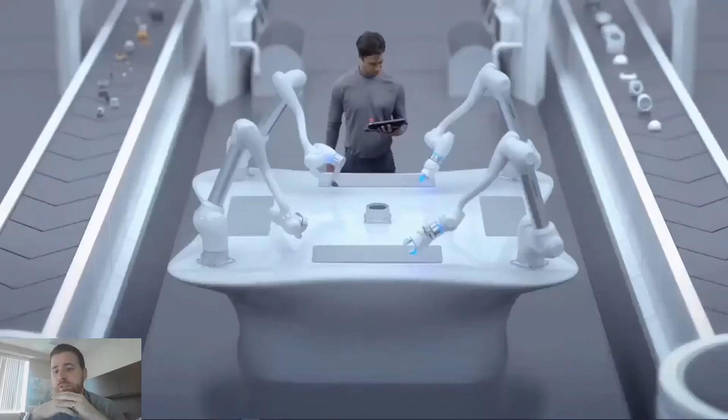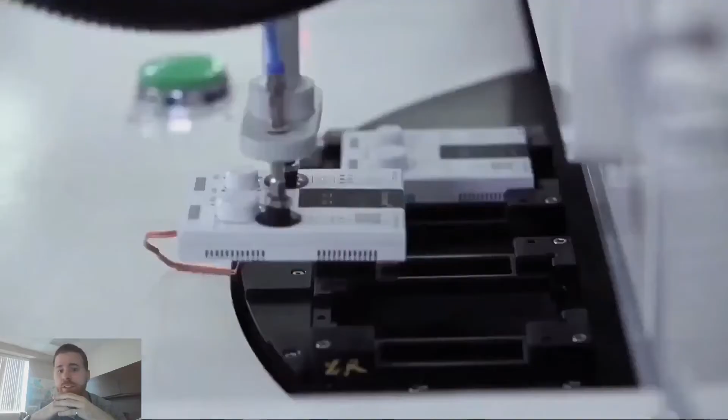Doosan Robotics was created a few years ago and is rapidly rising as one of the top cobot makers in the world. They just recently passed all the certifications needed to enter the market of North America and Europe as well. That's one of the reasons you're not seeing them yet.

The first series that Doosan offers is the M series, which comes in four different robots. The first robot is the M0609. The first letter of the robot's name represents its series, and the next two digits represent the payload. So 06 means 6 kilogram payload, and then the 09 represents the reach of the robot, 0.9 meter reach. Then there's the 0617 that has a huge 1.7 meter reach, and then there's the M1013 with 10 kilogram payload and 1.3 meter reach, and finally the M1509 with 15 kilogram payload.

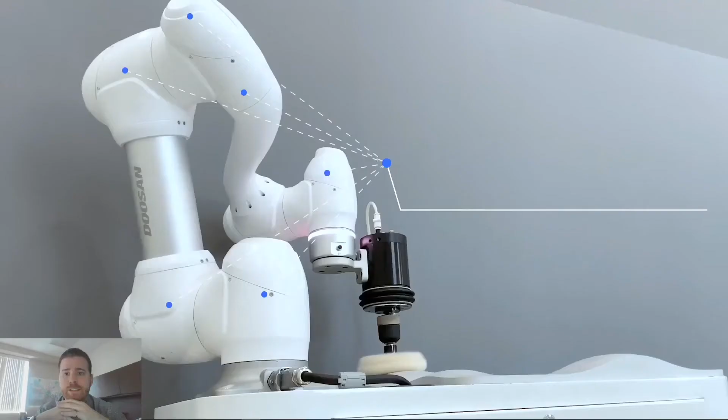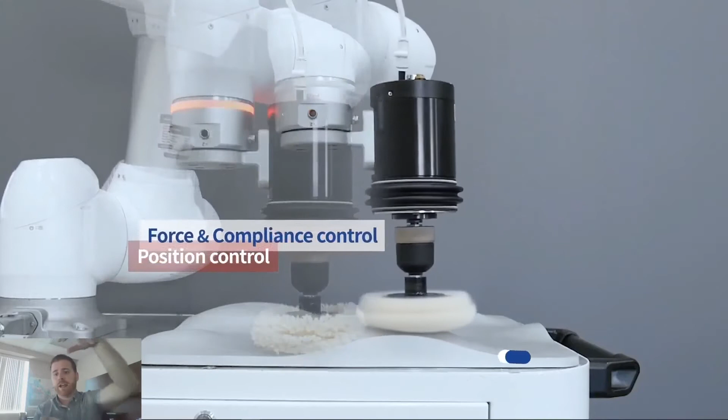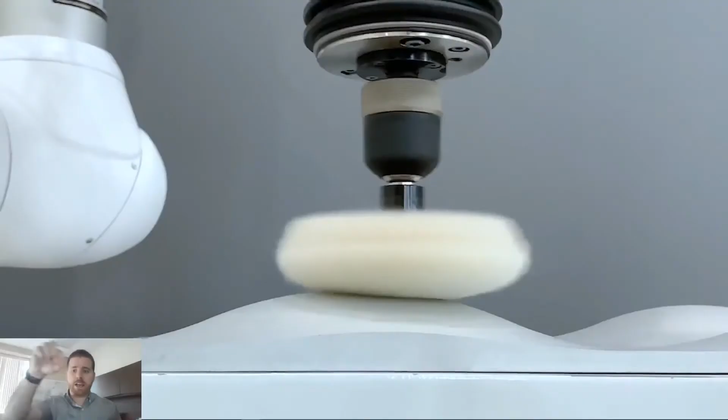One of the huge advantages of the Doosan M series is that they have torque sensors on every axis. Let me show you very quickly. The fact that they have torque sensors on every axis means that the M series is the most sensitive cobot on the market. It allows it to do some very advanced force and compliance controls. As you can see on the screen, you can apply a constant force and apply a compliance mode that will make the robot adjust itself depending on how much feedback it gets on the surface. So, unlike a robot that will try to follow the line, this robot is able to move around very, very efficiently.

When you order our M series, it will come with the controllers and the teach pendant as well. There are several options you can choose from, like the color of the robot, white or navy. You can also opt for a DC controller instead of the standard one, which will allow you to put the robot on a mobile robot, like our MiR robot, for instance. There's also a stainless steel model if you want it, and there's also the cockpit, an option that will allow you to take the robot and move it around freely. I'll show you a demo a little later to see how it works.

Then the second series is the brand new A series. It comes in four different models again. One of the main advantages of the A series is that the robot is both faster, more accurate, and also less expensive than the M series. We are pretty confident that the A series offers the biggest ROI on the cobot market right now.

The A series comes with its controllers, the DART platform, and e-stop buttons, and there are several options like the M series. You can choose between navy and white colors. The DC controller is yet to be released, but you still have the option to add a cockpit, and then there's the smart pendant and teach pendant that are available.

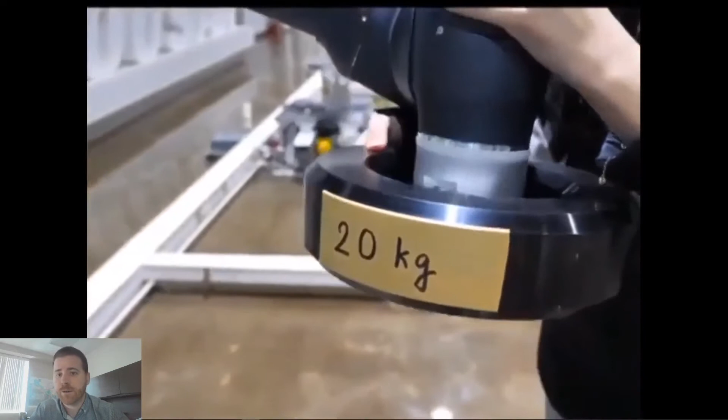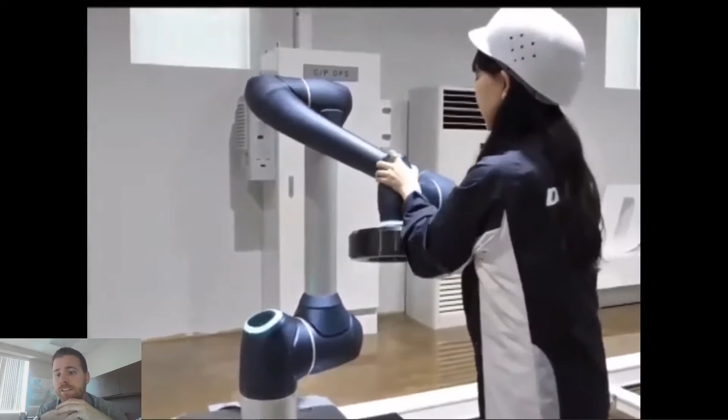Then finally, Doosan has just announced that by the end of this summer, the new H series will be available. The H series is for heavy, and will offer two robots: one with a 20 kilogram payload, as you can see on the screen right now, with 1.7 meter reach, and then there's the H2515 with 25 kilogram payload and 1.5 meter reach.

Those robots will be available at the end of the summer and will allow Doosan to offer the widest range of cobots on the market, with 10 different robots ranging from the very small A0509 to the huge H2515. Doosan offers many different features that are usually only available on industrial robots.

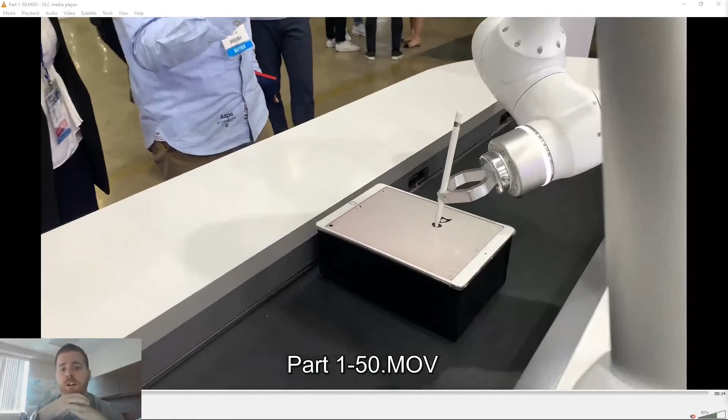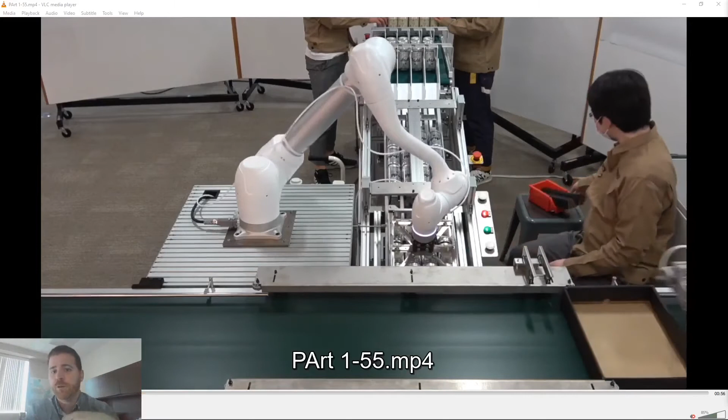One of those is conveyor tracking, if you want to follow objects on the conveyor. I'll just show you a more concrete example with Asahi Group, who have selected Doosan for their beer packaging solutions. As you can see, the Doosan will go and pick several bottles at the same time and place them directly on a moving box.

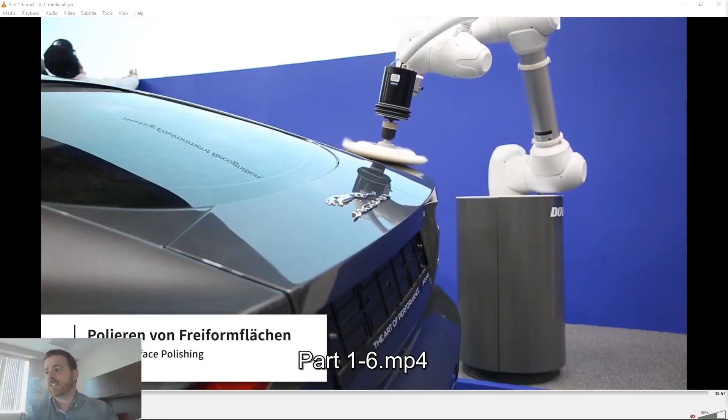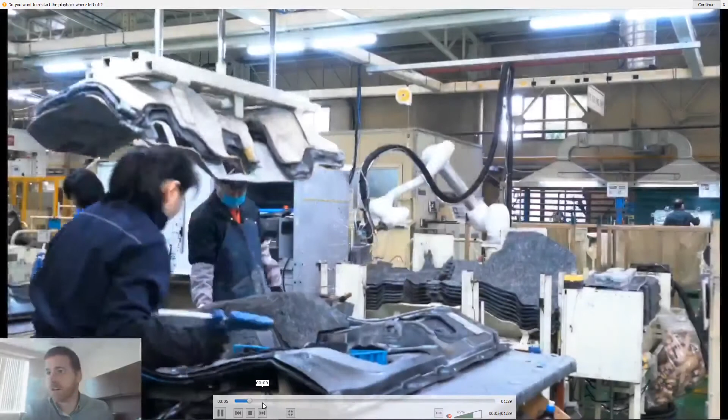There are many different applications you can have for the robot, such as polishing, for instance. There's also gluing or painting, if that's something you might find of interest.

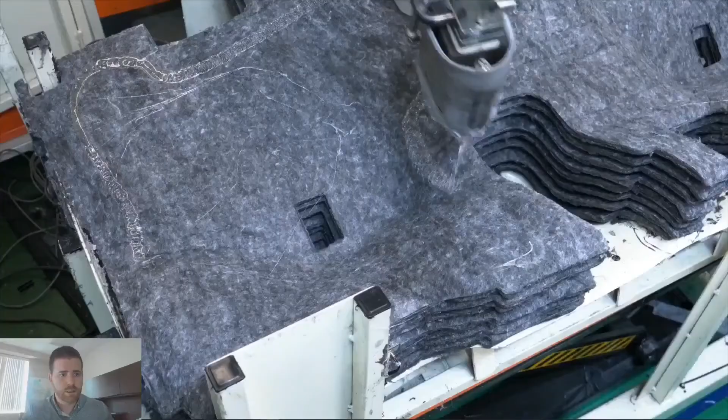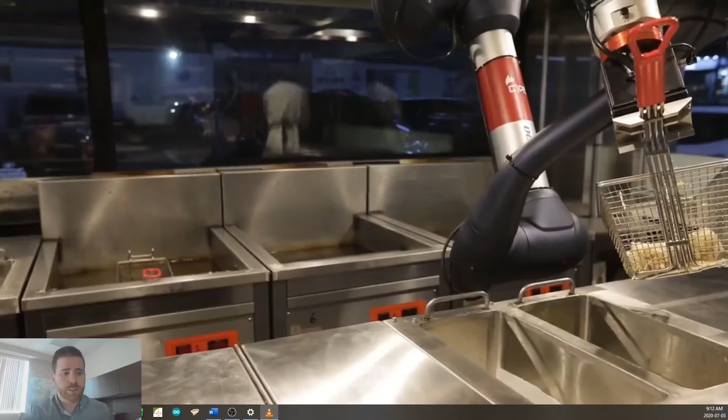And many consumer applications like fried chickens. So yeah, Doosan is able to do many different kinds of applications, and I'm sure you will find it very interesting to work with. Also, Doosan is the only cobot on the market right now that offers a proper simulation environment, as you can see on the screens.

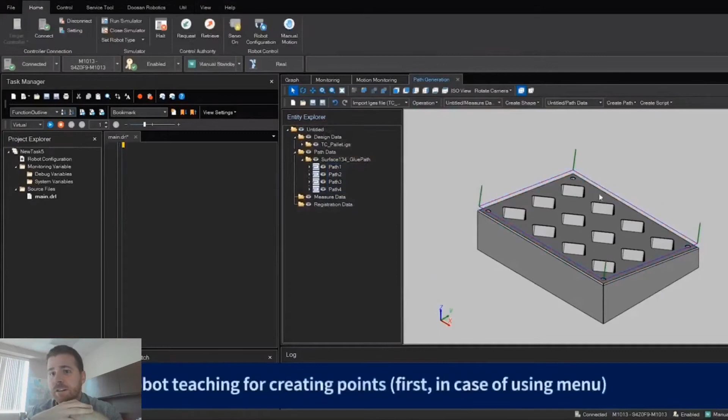The Dart Studio that is available for you will allow you to do some very accurate simulations. You might find it interesting to learn that Doosan is also programmed with Python, one of the most known languages, and the most recommended language by STEM, science, technology, engineering, and mathematics.

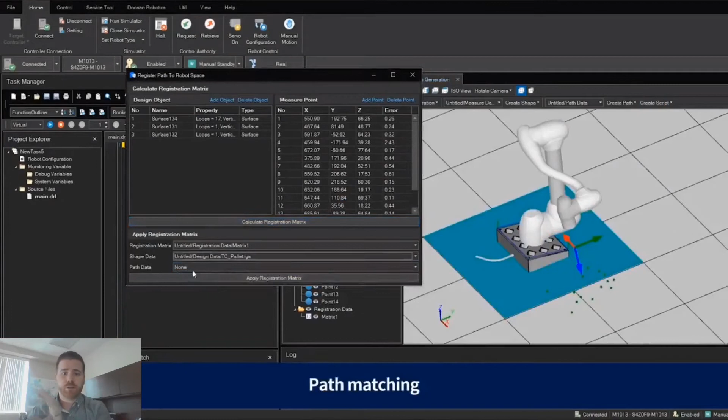There you have an example of DART-Studio, where you will just take the 3D CAD model of a piece. The person has just taught a point cloud and will apply a path match to be able to locate the pieces related to the robot in the simulation environment, and then you can do a program very nicely.

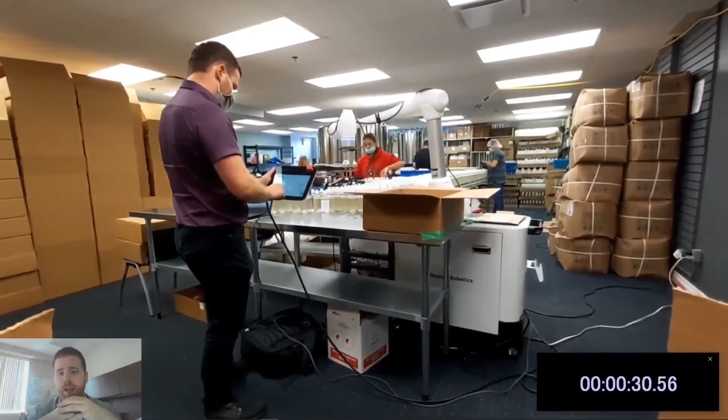I want to tell you that the robot is stock, so there's no programming that has been done before. So, as you will see, the first part that I did when arriving at the customer was to program the tooling. I just made the robot prepare the configuration to allow it to communicate with the grippers.

Then the second part is to set the box pattern. So we'll take a look at the box to count how many bottles there are, how many columns I've got. So I got 6 columns and 8 rows.

Then I will just take the robot, take one of those bottles, and put it inside of the box to do what we call a 3-point calibration. I will bring the robot to the first point, as you can see on the screen, to teach it, then move the robot over to the second point, and lastly the third point. That will allow the robot to know where the box is located relative to itself.

Once those two configurations have been done, I can start working on the main program. So the first part of the program is to program the pick sequence. I will put a bottle, bring the robot to the pick position, and program the pick sequence.

Right now I'm doing the first test to be sure the picking is done properly. Then when the pick routine has been finished, I can add the box pattern that I worked on before and test the place sequence. I just did a test and it seemed to have succeeded.

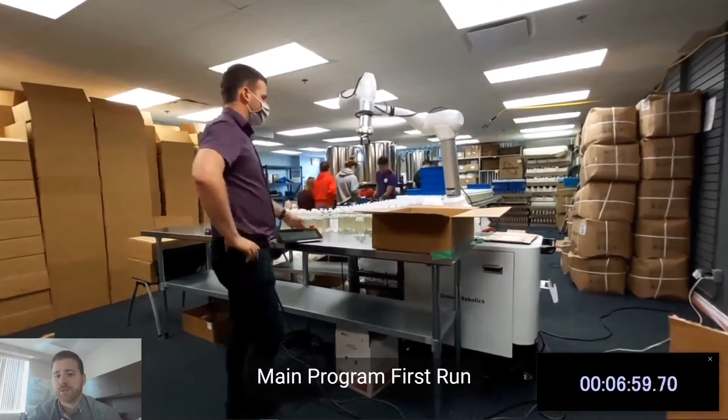So now all that remains to be done is to test the main program for the first time. I got an error right now, and I just noticed that the pick fail feedback was a little too short. So I have to raise it just a little bit, and then I was able to try a second run.

That should happen very soon. Yeah, there you go. I just tested a second run, and the robot properly placed the bottle. It's a success. So all that remains to do is clean up, activate the main loop, raise the speed, and there, the robot program has been finished in just under 10 minutes.